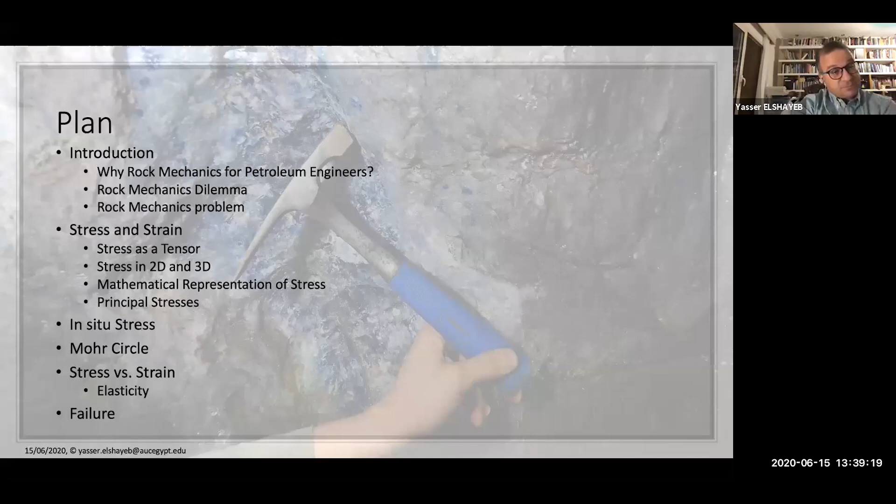Why rock mechanics? Because we live on a planet called Earth, and this planet is composed of rocks. And those rocks have been on the ground for many years, since the creation of the Earth. The Earth, as you may know or may have read, was very hot at the beginning, and then started cooling down, and then life started appearing on Earth. And when I speak about life, I'm not speaking about us as human beings, but about other species like bacteria, unicellular organisms, and plants as well.

And this is what we call today the magma, the lava, which is the very hot core of the Earth. And this constitutes a type of rock that we deal with and use every day. Sometimes we use it as a building material. Sometimes we penetrate it to reach the underground. This is called igneous rock. Then this igneous rock is decomposed and resedimented somewhere else through a physical process that we call weathering. Once it is sedimented, it becomes soil, and this soil is compacted and becomes sedimentary rock, which is the second type of rock that we have on the Earth's surface.

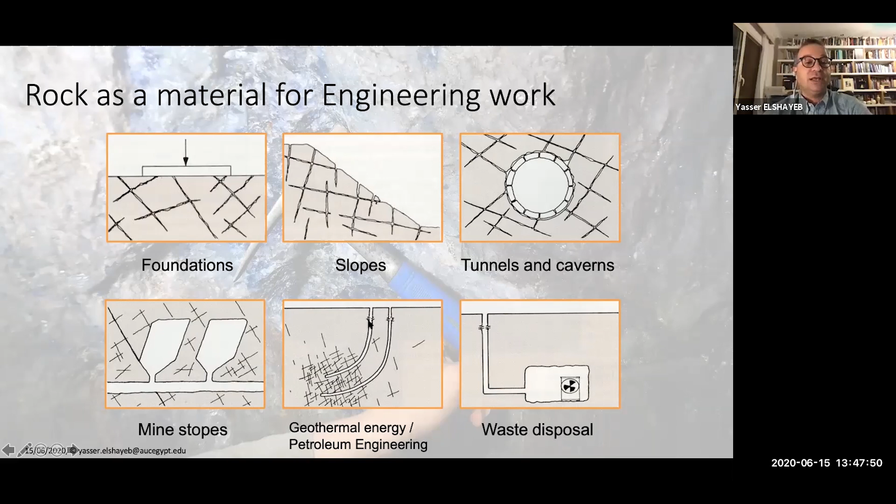It continues actually, discussing rock stresses and what are the needs for rock mechanics in petroleum engineering. This paper tries to pave the way, to put a benchmark to say that it is very important to learn and understand rock mechanics as a petroleum engineer. Here I'm citing some of the outputs of this paper, and some of the experience about why you, as a petroleum engineer, need to understand rock mechanics.

Of course, when you do drilling in the underground, you need to understand rock mechanics, the mechanics of the material that you are penetrating. So it's a clear case for drilling engineers. It can determine the drilling rate, whether you're in an igneous rock or a metamorphic rock, or what are the layers below the surface. We always use rock mechanics when it's about hydraulic fracturing.

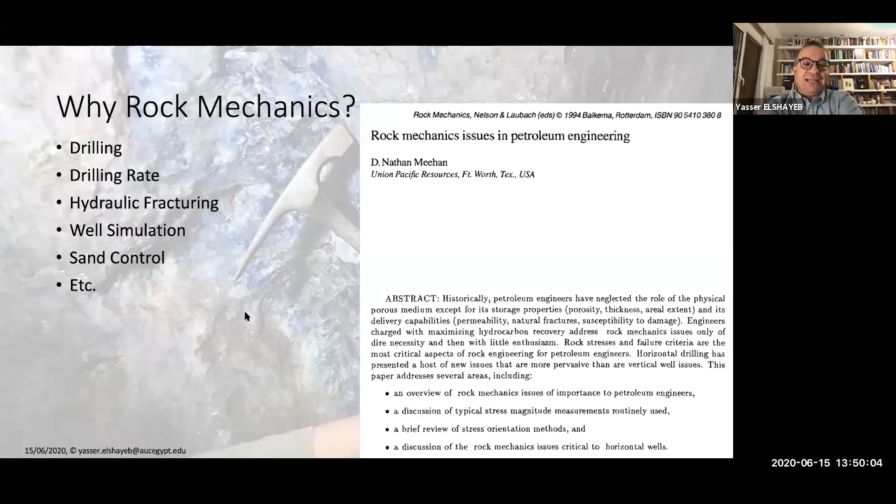Now, the dilemma of rock mechanics, and this is one of the major differences I have to stress, as I said at the beginning: if any of you have studied strength of materials or mechanical engineering, you knew stress, strain, and elongation, and you maybe had the chance to go into a laboratory, get a piece of metal, and make a tension test on it, and this metal will crack.

The dilemma of rock mechanics is that this natural material we are working on is actually heterogeneous. It's not homogeneous at all. Even though we say this is an igneous rock, or a metamorphic rock, or a sandstone, or a limestone, when we look into the chemical composition of those rocks, you will find that whenever you move like 10 centimeters from one place to another, the chemical composition of the material changes, and it changes a lot.

It is also a discontinuous material. It's not a continuous medium. It's full of discontinuities, cracks, joints, faults. A lot of those impurities, if you can call it this way, exist in this medium that we call rock.

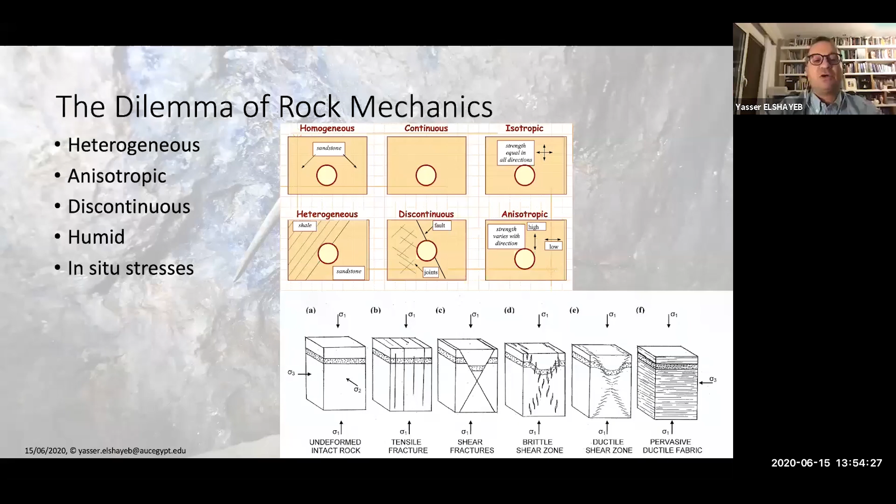Now, generally speaking, very macro level, what is the main problem of rock mechanics and engineering?

I would say it's quite similar to those of us who work in civil engineering. You need to build something, or dig something, you need to do an engineering work, and the material you're working with has a certain strength or resistance. You need to know if this excavation, this thing that you will build or dig, will be stable or not. So you need to understand the forces acting on it, and the resistance acting on it as well, and you may need a factor of safety to make it stable.

So if you are digging an oil well that will be 1,000 meters below the ground, you need to know the resistance of the rocks you will be penetrating, and the pressure or stress you will be applying on those rocks. The ratio between the two, the force and the resistance, is the failure probability, or failure possibility, I would say. That's why you need to understand this, and this is, I would say, everything in engineering.

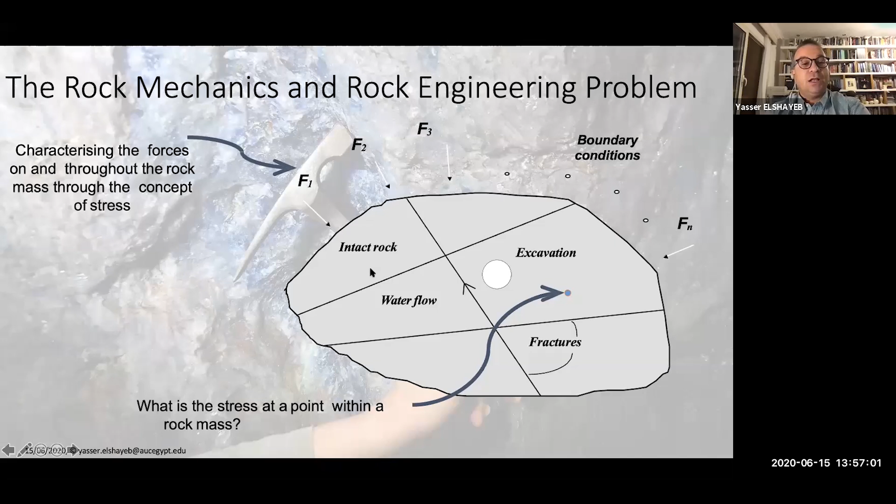Yeah, I'm just repeating the same thing I've said. What are the forces applied? What are the elements of resistance? How safe is the structure, be it an underground excavation like the ones we do in mining engineering, or just a borehole or an oil well of 4, 5, 10, or 15 inches that we are putting in the ground.

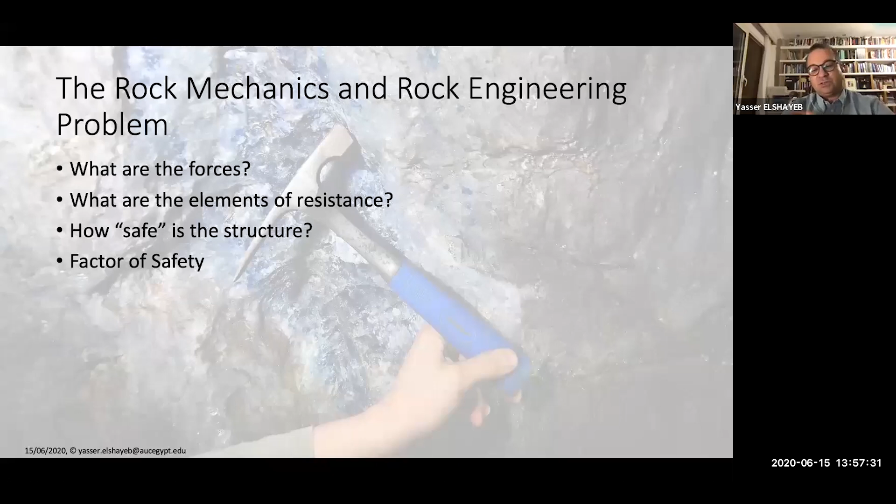Now let's speak about stress and strain. Actually, I'll speak more about stress, because strain is the result, but stress is the main driving force. The basic concept is that stress is a tensor, and tensor is a mathematical term that denotes, that gives some meaning.

And here I'm starting with vector mathematics. In vector mathematics, we say we have scalar quantities, which are like temperature, like energy. Those are quantities that we measure that have only a value. So the temperature is 6 degrees Celsius, that's all, there's nothing else to be said. Energy is 30 kilojoules, or 200 HP, for example.

It's just a quantity. Then come other physical phenomena that have a quantity and then a direction, so they have a magnitude and a direction. This is like velocity, this is like force. Because when you say speed, like my speed is 300 kilometers per hour, you need to also say the direction, northeast, or east, or south, or whatever, or normal, or tangent, or whatever.

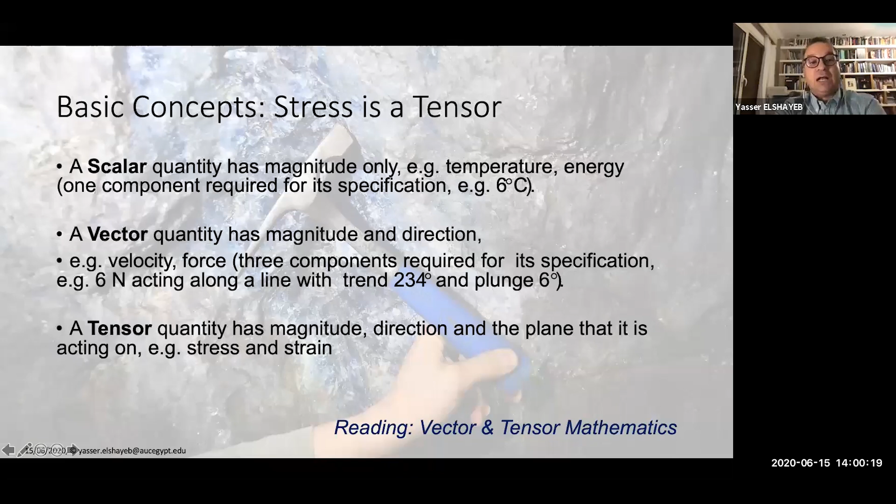Normal and shear stress. We have also in physics a phenomenon where a solid can sustain a shear force, whereas liquid or gas cannot. If you have a liquid or gas, you cannot do any shear on it - it's just a fluid that is there. Liquid and gas contain pressure, meaning they endure pressure. While rocks can sustain shear force, and can contain stress, which is actually a tensor quantity.

So this is another difference between, for example, oil and gas, or the oil itself, and the rock that is containing that oil. The oil, we can measure its pressure. But if we speak about the rocks, we need to speak about stress - we need to speak about the direction of application, and we need to speak about the plane of application.

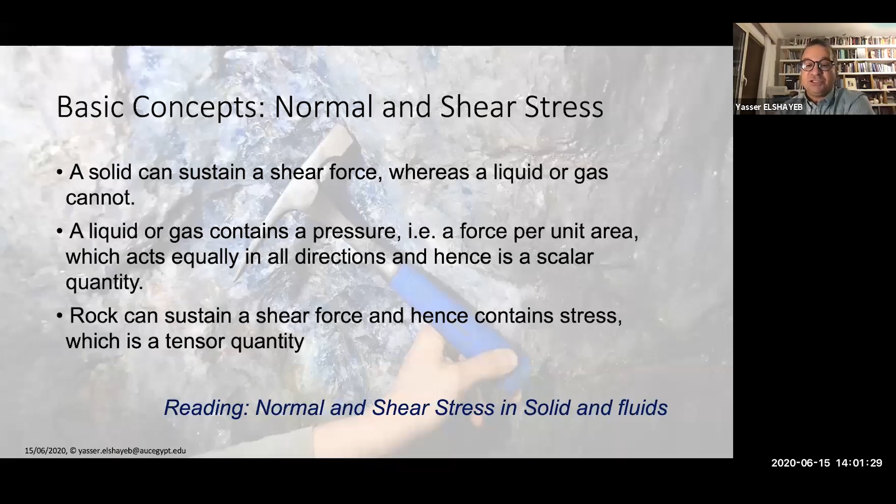Again, the reading here will be normal and shear stress in solids and fluids. Now, the basic concept - the stress, by definition, if we speak about 2D, is the force per unit area. So we have a 2D plane, and in this 2D plane, you have a force that is applying on it, with a direction, and then you have the plane of application. So we're constructing the tensor now.

Here we start speaking about normal force and shear force, which is translated into rock mechanics, because we divide this by the unit area - the force itself is not important. What's important is the ratio between the force and the unit area, which we call the stress. So we have the normal stress, sigma n, and the shear stress, denoted by the Greek letter tau. And we have the angle of application, which is theta.

Those are usually the three symbols that we will use all over: sigma for stress, tau for shear, sigma normal for normal, and theta for angle of application. Sometimes we say sigma n and sigma t, or sigma s, which is sigma normal and sigma shear. But this depends on the place that we are working.

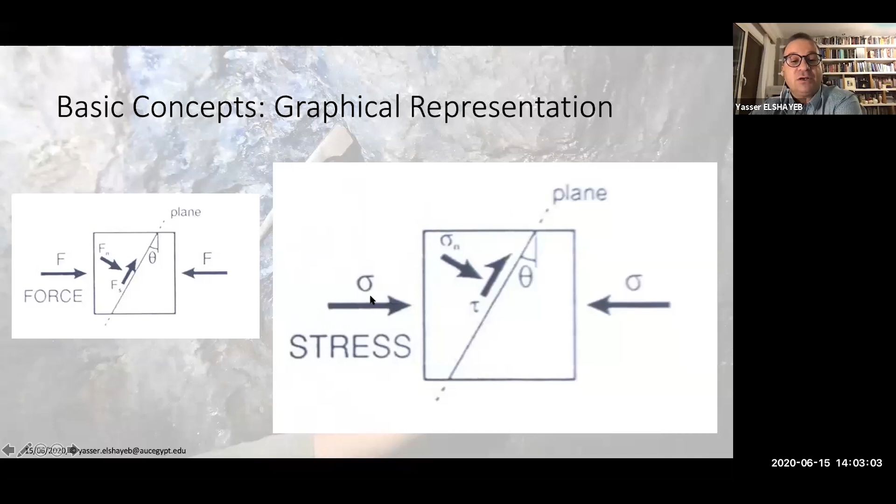Now, if we put this into the form of a tensor, in 2D we have sigma x, sigma y, and tau xy. This is the composition of the force in 2D. Mathematically speaking, the normal is sigma multiplied by cosine theta, and the shear is sigma multiplied by the sine of theta - and that's it.

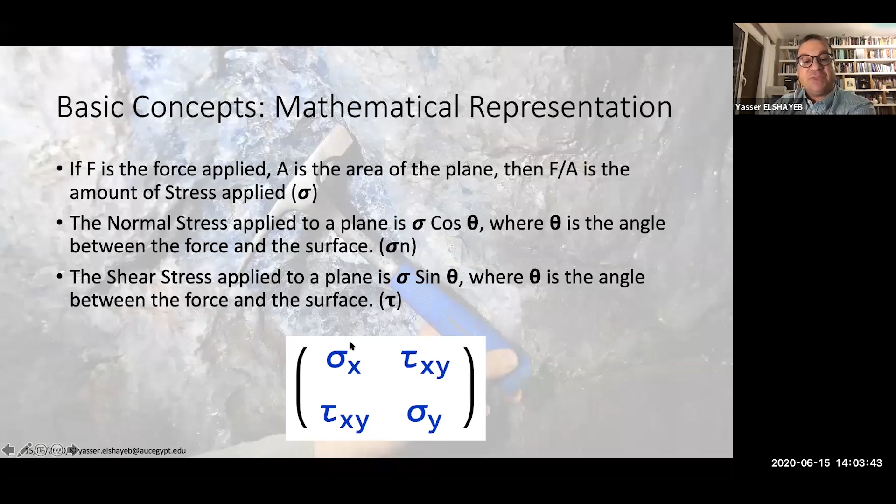Now, if we move into 3D, it becomes a bit more complicated, because we have 3 surfaces - actually we have 6 surfaces in a cube, but I'll speak about the symmetry right after. On every plane of the cube, we have a sigma x, sigma y, and a tau xy. To make things easier, we start using xx, xy, yy, and zz to say this is on plane x, this is on plane y, this is on plane z, which is then analyzed into sigma xx, tau xy, and so on. So for every plane, you have the normal and you have two shears - one in this direction and two in the two other directions.

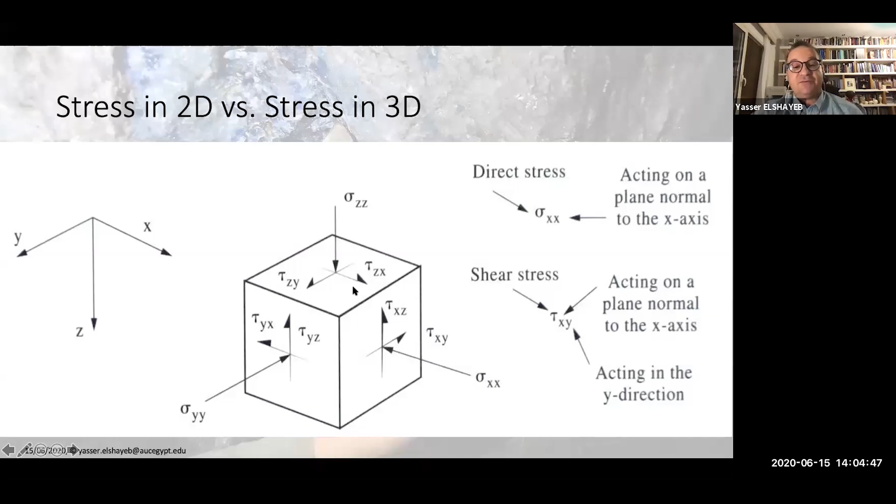And if we look into it in a tensor format, you have the sigma xx, sigma yy, and sigma zz, and then you have the tau xy, the tau xz, and the tau yz. Here we speak about the sigma x in the direction of y, sigma x in the direction of z, and here we speak about the sigma y in the direction of z, and so on.

Now this is if we are speaking about a cube, where we have 6 surfaces, so we should have 9 components of stress, as it's written here. But actually, usually when we speak about stress in 3D, we speak about the symmetry of the values, because usually the tau xz is equal to the tau that is resultant of the sigma z in the direction of x. So this value and this value are the same. This value and this value are the same. This value and this value are actually the same, which makes us say that usually a stress tensor in 3D has only 6 components.

It has only, maybe we can write it, I don't know if I can do this, pen, yes. It's only those values. The 3 others we can neglect, because they are redundant, symmetrical to the ones that are here, and this makes our life much easier. So instead of calculating 9 values, we need to calculate only 6 of them, and that's it.

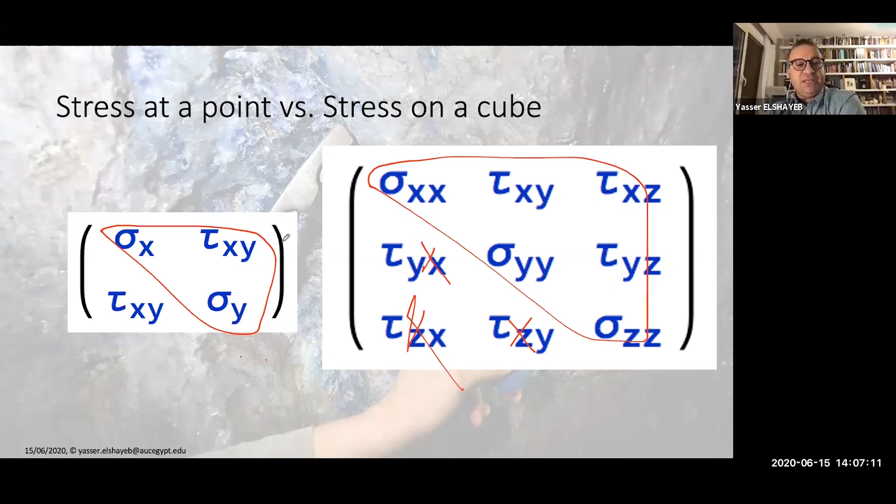Yeah, this is what I just said about the symmetry of the tensor, and that's why we don't consider the values below the diagonal. We just consider the values above the diagonal. So we have only 6 independent components. Now, of course, there is a lot of mathematics in how to calculate those stresses and so on.

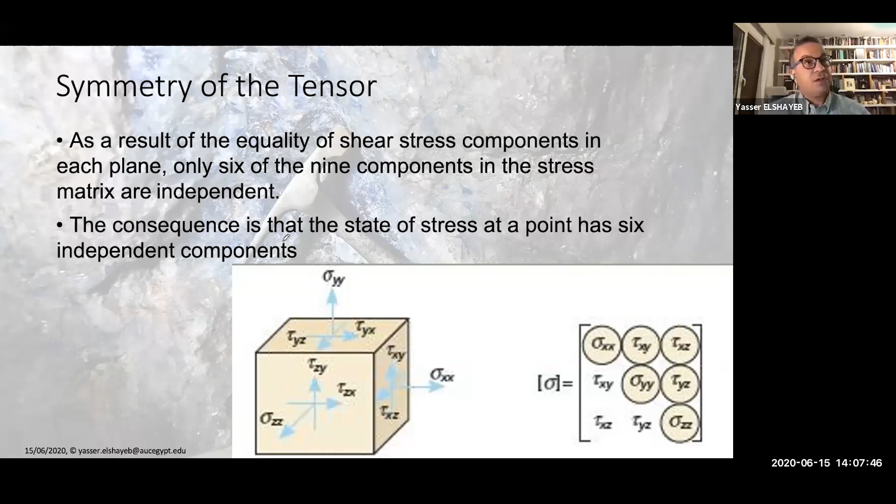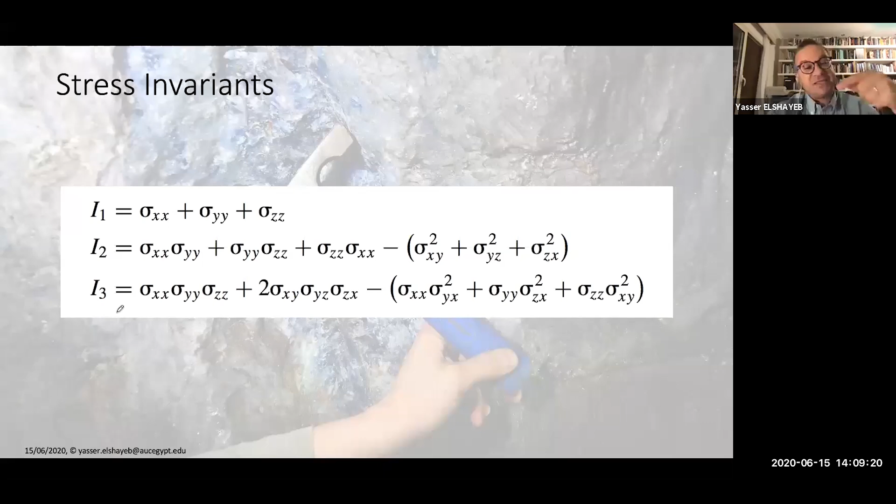Because if you have a cube in space with a stress applying on it, then you have a certain sigma x, sigma y and sigma z. If you rotate this cube in space and you still have the same stress applying to it, you will find a different sigma x, sigma y and sigma z. But if you add those 3 components together, you will always find the same value. And it goes again for the 2nd order and the 3rd order. Those are just calculations. It helps us sometimes to deduce the value of one of the sigmas out of the other sigmas. So it's very important and very interesting mathematically for those who are working in rock mechanics.

Now, another interesting fact is principal stresses. This is a concept that has been developed by mathematicians in rock mechanics and mechanics of materials. Principal stresses are, I mean, it's the position in space. As I was just saying, you have a cube subject to an amount of stress. If you rotate this cube on the x-axis, the y-axis or the z-axis, you will have a different amount of stress.

But we have observed that there comes a situation when you rotate this cube in space where you will find only normal stresses applied to it. So you have only sigma x, sigma y, and sigma z, and you don't have any shear stresses applied to it. This is a very unique situation. It happens only once. And this is what we call the principal stresses.

So the principal stresses, by definition, are the values of three stresses applying in 3D on a cube, on a very small cube actually, and those three components of stress have no shear. They are only normal stress. And here I have the cube, and the cube is rotated in space, and then you have sigma 1 and sigma 2. We usually call it sigma 1, sigma 2 and sigma 3.

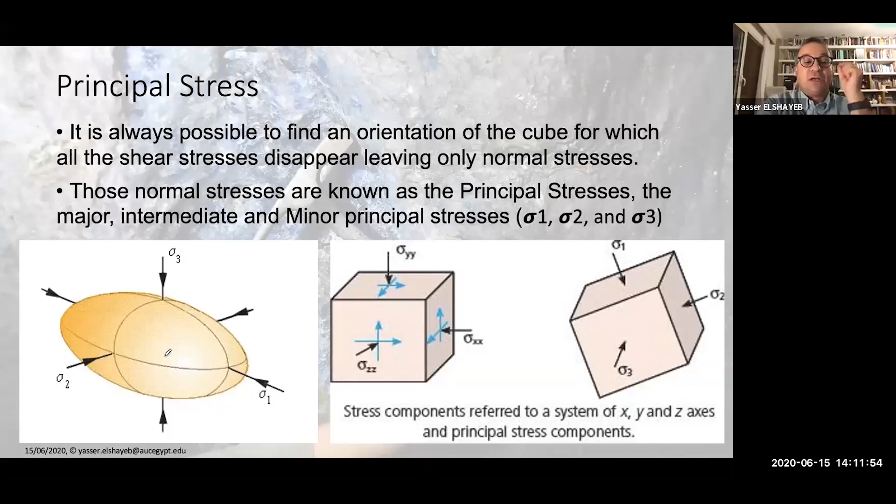Now, the reading that I'm putting here is stress rotation. Maybe you need to read about stress rotation, how to rotate it. And I'm putting here the equation that we use in order to deduce the maximum and the minimum stress in 2D out of sigma xx, sigma yy and tau xy or sigma xy. We usually use sigma and tau as two symbols for the same thing. And this would be the angle of inclination of the principal stresses with respect to the direction of sigma x and sigma y.

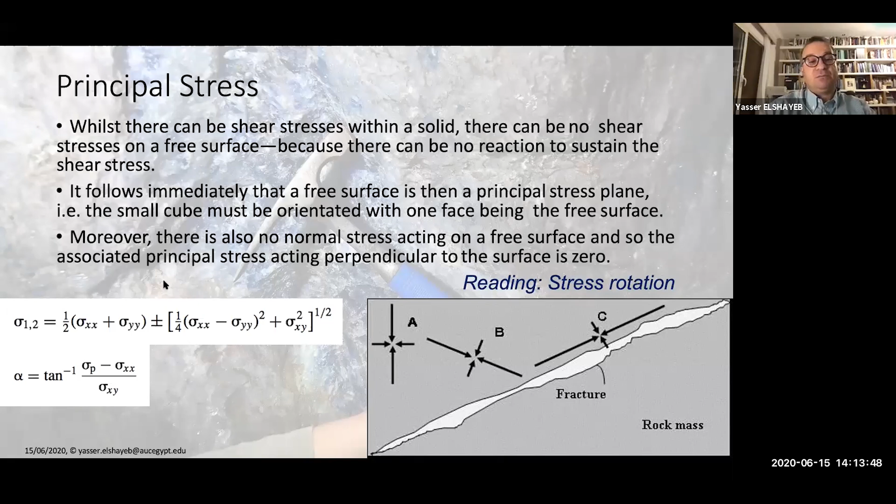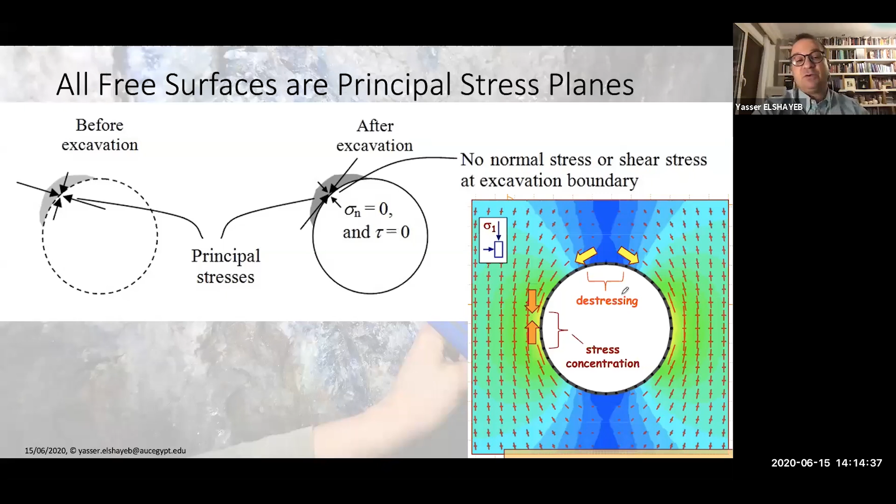We use this as well in tunnels in order to put support so the tunnel does not collapse. So we use it horizontally when we do horizontal tunneling, but as a petroleum engineer, you may want to use it also vertically because you have your wells going vertically. So it's the same.

Now I'll come rapidly to the in situ stress. In situ stress is actually the result of everything that happened on Earth since its creation until today. So I'm going into the desert, and in the desert I would like to dig a hole into the ground in order to search for water, or for oil or gas, because I was told that there is some oil and gas here.

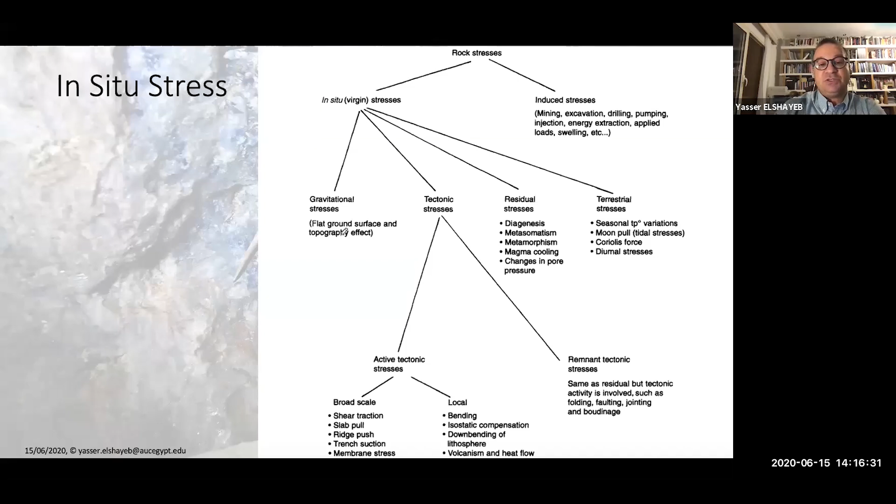Of course, you all know about the theory of plate tectonics, where all the continents are like floating on a sea of magma, and those tectonics are moving and are colliding with each other, and those collisions induce a lot of stresses, a lot of storage of stresses in the ground. And this is one source as well of in situ stress that we need to take into consideration.

This is the equation that we use in dams. This is the equation that we use in water tanks. This is the equation that we use even in submarines. This is the equation that we use when we do scuba diving. I mean, it's everywhere. You multiply the specific gravity by the depth, and you get the amount of pressure that will be applied on you when you are in this place or on this place. And usually this application of pressure is in every direction. And I recall what I said before, that this happens in fluids, but when it comes to rocks, when it comes to solids, it's a completely different story.

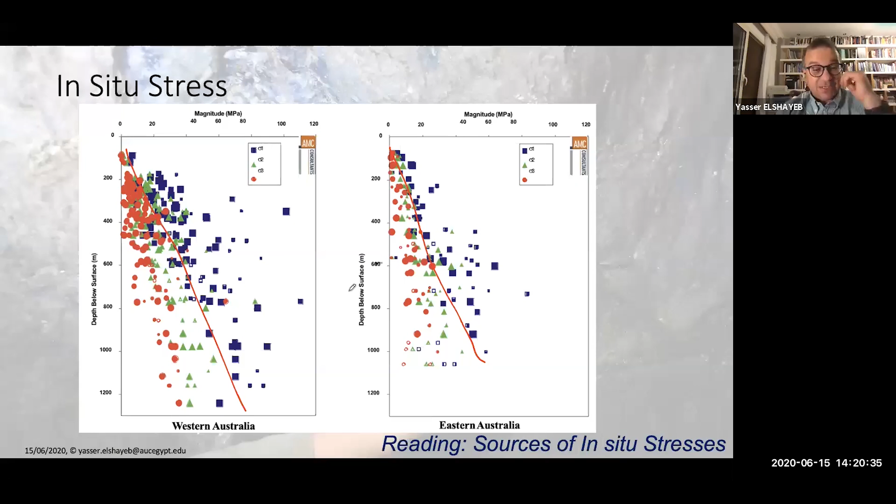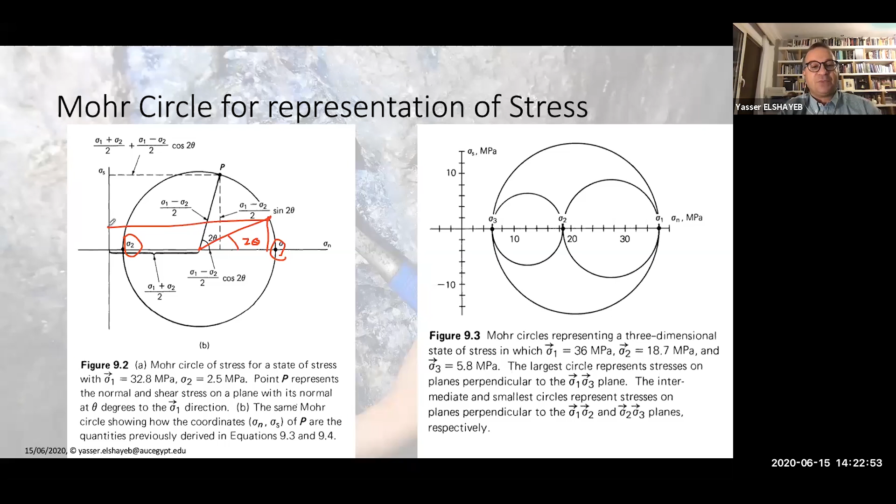And again, I'm sure that you may have seen this kind of graphic before, and you may also want to look into Google and type Mohr circle for stress analysis or stress understanding, and you will get a lot of materials and a lot of information.

Another aspect that we also find underground, I'm sorry, this slide should have maybe been in the in situ stress, it's misplaced here, is that whenever we go below the Earth's surface, we observe an increase of temperature. So you go into the ground, and you will have a mechanical stress, which is the resultant of many things, but you will also have a lot of thermal stresses. And here we are speaking about how much, empirically speaking, temperature is increased whenever you go below the Earth's surface.

And I will invite you here to read a little bit about this coupling. We call it the thermal, hydrological, mechanical coupling, because this rock below the Earth's surface is subject not only to mechanical stress, but also to hydrological stress from water or oil or gas. And it's also subject to thermal stress resulting from it being below the Earth's surface. And you will find from this graph that you can derive an empirical formula that would tell you, for the first 1,000 kilometers below the Earth's surface, how much temperature will be increased.

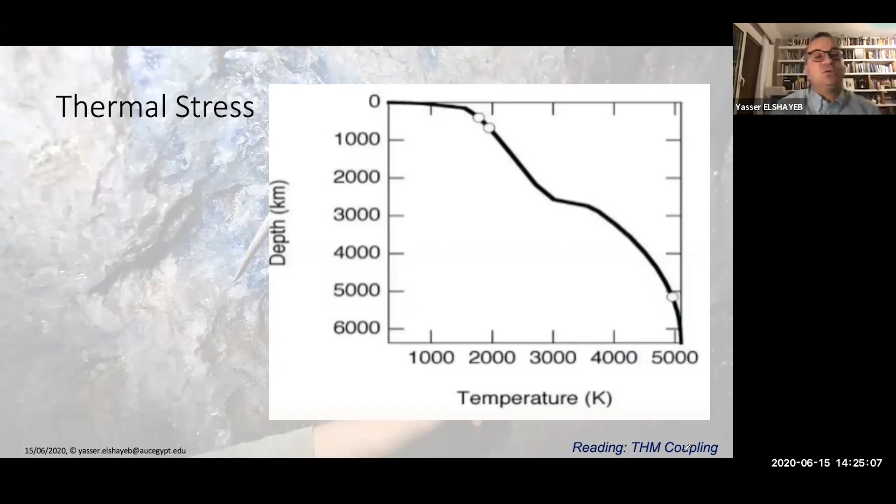Now, the final two parts of the presentation, and again, you may have seen this graph before. It's the stress strain curve, where we put our specimen under a machine, and we start to measure its strain caused by the stress applied. Usually in strength of materials, if you speak about iron, for example, you have a graph that is like this, and then the specimen will collapse. But in rock mechanics, the curve is usually much longer, I would say, because again of the nature of the rock that we are working with.

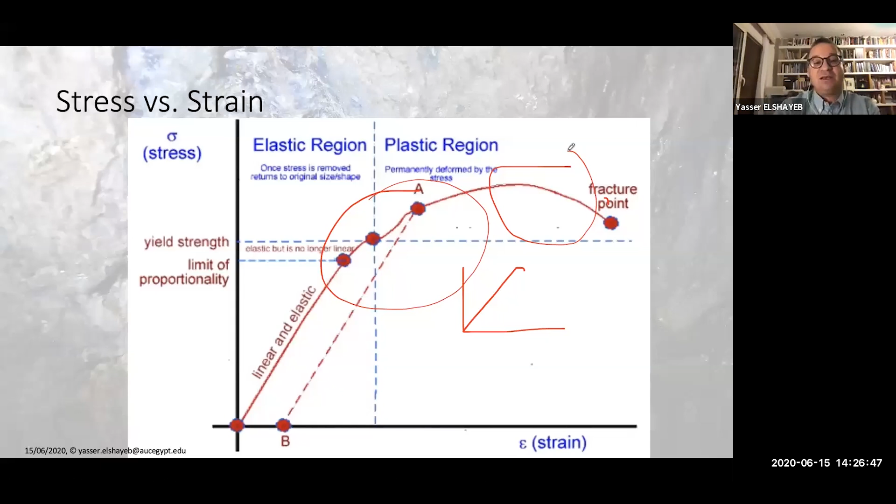The first part, where it's more or less linear, so more stress, more strain, we call it the elastic region. And then comes a zone where things are, I would say, completely out of control. So not much stress, but very much more strain, and then it will go up, and then it will collapse here. And of course, if you look into the literature, you will find a lot of research that is still being done on the values and the behavior in this area or in this area here. But generally speaking, this is the curve that we speak about when we speak about the rock mechanics stress and strain relationship.

And of course, if we speak about stress and strain, then we need to start defining some values, some constants. The most important is the Young's modulus, which is the ratio between stress and strain. So you measure the stress applied, you measure the strain resulting from that stress, and you divide those two values, and you get a modulus called Young's modulus. We even call it the Young's modulus of elasticity.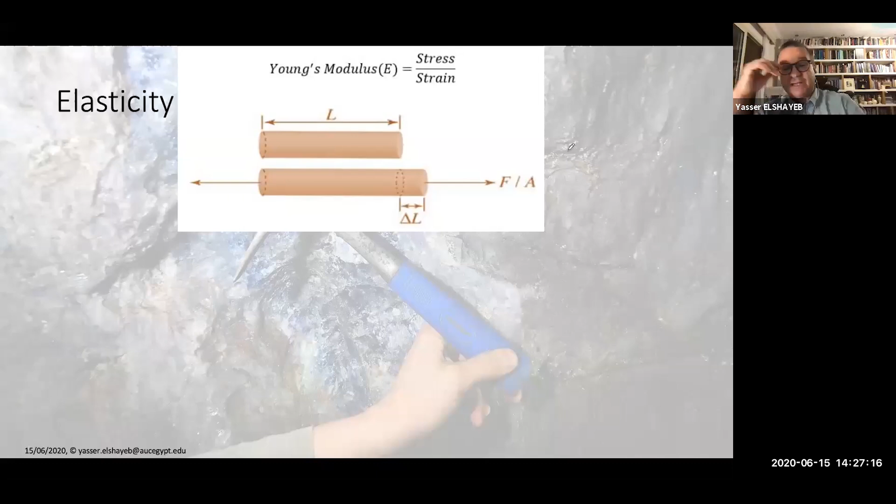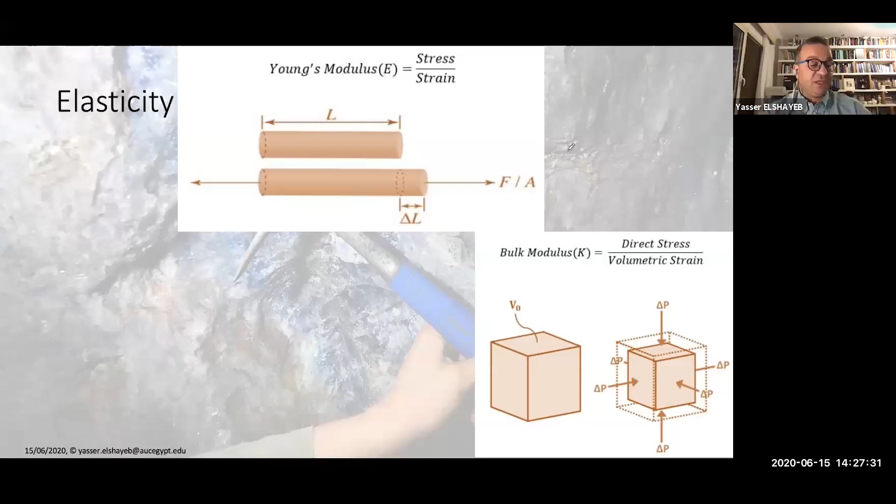We have another constant that we use, which is called bulk modulus, which is the ratio of stress divided by the volumetric strain, so the change in the volume when we do compression. Then we also have rigidity modulus, which is the shear stress divided by the shear strain. That's also quite important.

Then we have an interesting ratio, which we call the Poisson ratio. This Poisson ratio is the lateral strain divided by the longitudinal strain. So you stress a piece of rock, and then you measure the lateral strain that happens and the longitudinal strain that is also happening. And the ratio between those two is the Poisson ratio.

And you can, of course, start asking questions about the limits of that value. Can we have a longitudinal strain that is equal to lateral strain? Can this happen, that you have lateral strain that is the same as the longitudinal strain? Can this ratio be, for example, of a value of 1? Those are very good questions that we can ask, and we can answer them mathematically.

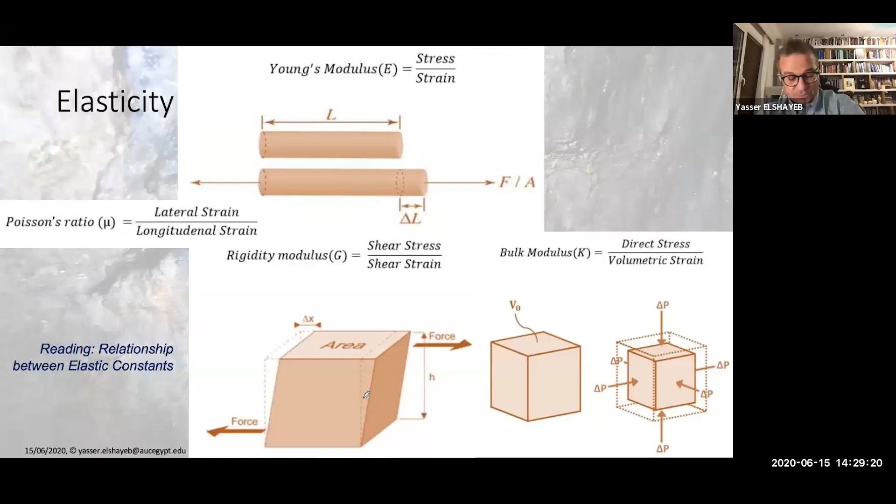And actually, there is a mathematical relationship between all those 4 moduluses that you can find also in the literature. If you type on Google relationship between elasticity constants, you will find that the bulk modulus could be computed as Young's modulus multiplied by X or Y or Z, and things like that. Yeah, this is the reading. It's a relationship between elastic constants. Maybe you need to look at it.

Final word, very rapidly. I know that time is running, and I'm sorry that it took me so much time. It is on failure. What makes it fail? What we usually do is we use Mohr circles. We draw the x-axis as the sigma, the normal stress.

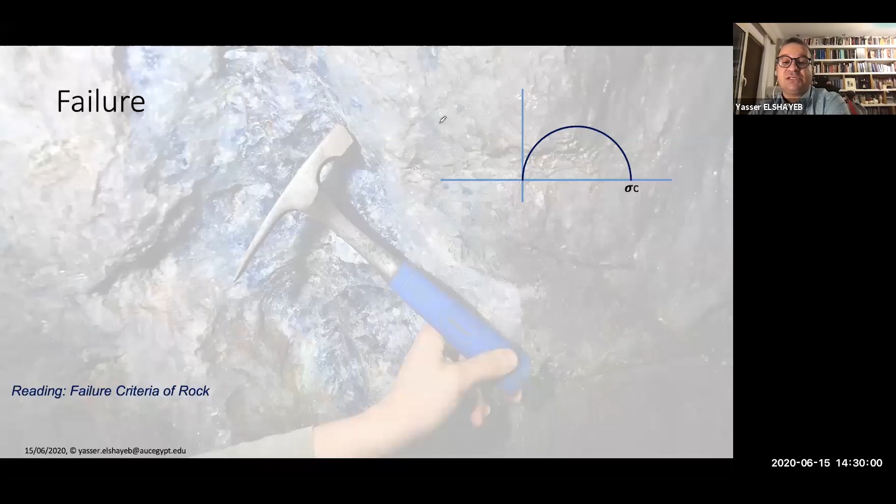And so we have here a sigma c, which is compressive strength, the amount of compression that we have applied on our specimen. And then we have sigma t, which is the tension strength. And then we take the tangent of those two circles or half circles, and we define two constants: phi, which we call the angle of internal friction, and a value called cohesion. And we use this a lot for the failure mechanism and the failure criteria of any rock.

I can tell you, for example, that this angle phi is the angle which, when you go to the beach and you sit on the sand and you start building cones of sand, this cone of sand cannot have an angle more than 42, 43 degrees. And this 42, 43 degrees is actually the angle phi, the angle of internal friction. It's a physical property of the rock.

So next time you go to the beach and you try to make some cones out of sand, try to think that the angle of this cone is actually a physical property of that. It's a mechanical property of that rock, and you need to keep it in mind.

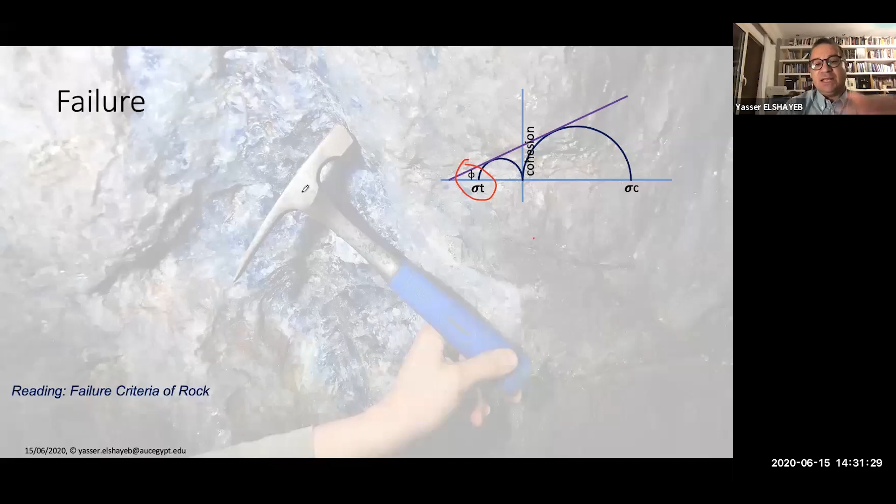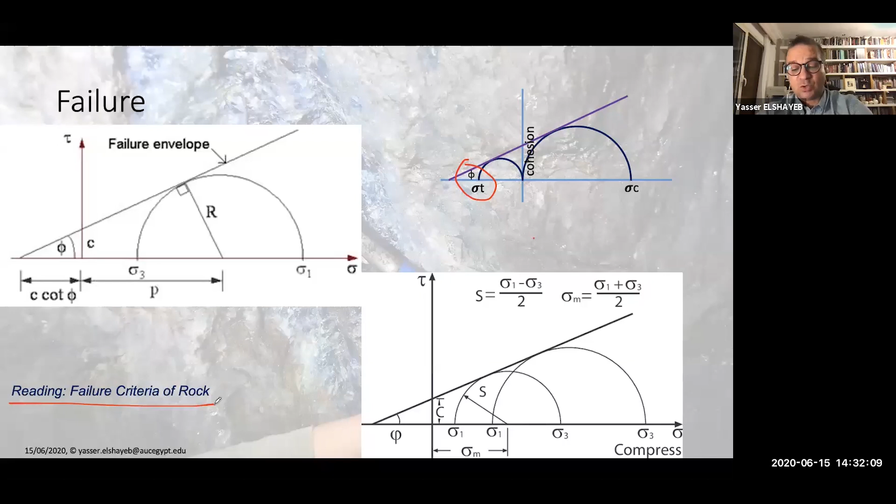Now there is a lot of research going on the failure mechanism. I think maybe I put it in the reading. It's in the reading here. I call it the failure criteria of rock, because there is a lot of research done on that. There are at least 4 big families of failure criteria in the world today, how the rock is failing and how to predict its failure. You can find it very easily on Google if you search for failure criteria of rock.

Now, a recap. Again, I'm sorry I ran out of time. In the introduction, we spoke about why rock mechanics for petroleum engineering, and we saw that it's very important for drilling, for reservoir analysis, for hydraulic fracturing as well. And we spoke about the dilemma that this is a natural material, and it is heterogeneous, anisotropic, humid, fractured, not continuous. And the problem is to predict its stability.

Now, stress is a tensor. It's not a scalar. It's not a vector. It's a tensor because it also has the plane that it's acting on. We have stress in 2D and stress in 3D. We have normal stress and shear stress, and we can present it mathematically by a tensor. It looks like a matrix, but it's not a matrix. Then we have the concept of principal stresses, which is a rotation in space where you have only normal stresses, without any shear stresses.

Then we spoke about the in situ stress, why it is there, and why we need to know it. And empirically, 0.028 multiplied by h is the empirical equation for in situ vertical stress. Mohr circle, I didn't speak much about, but you can search for it on the internet. Then we spoke rapidly about the elasticity moduluses, Young's modulus, bulk modulus, Poisson ratio, and so on. And finally, the failure mechanism of rock.

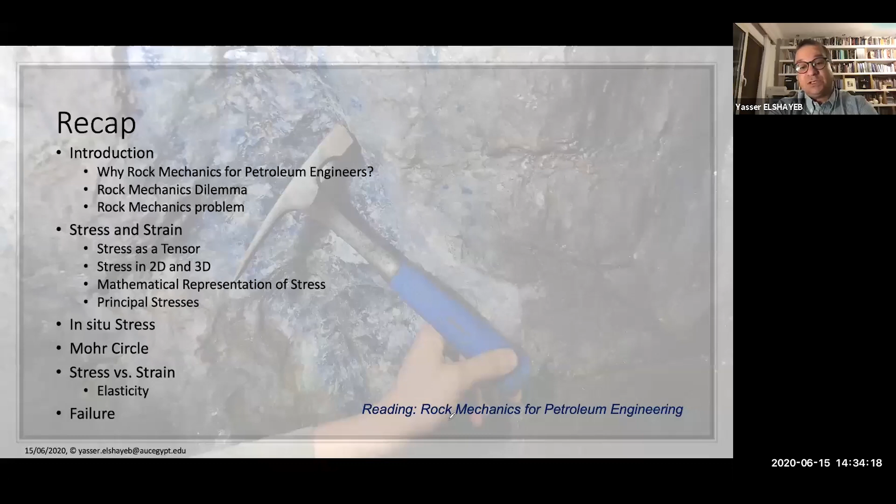Thank you so much, it's been a pleasure. Thank you so much, Dr. Ahmed, for inviting me here. Thank you so much for everyone who was here. I'm sorry for the time that has run from me. And of course, I'm ready for any questions that you may have.